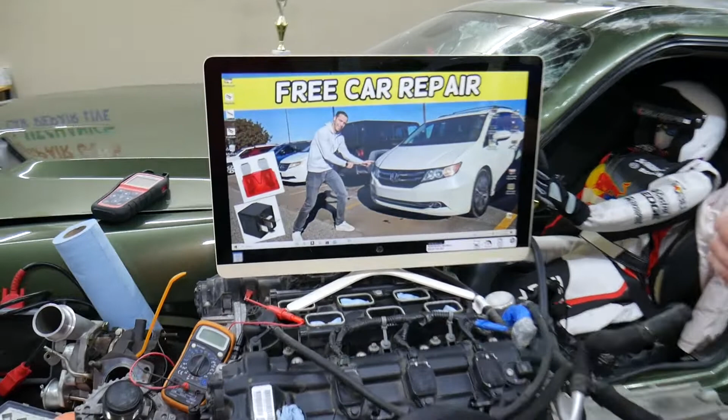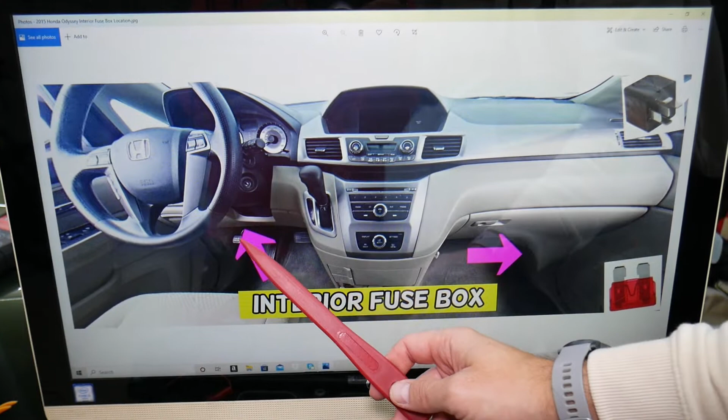So let's go ahead and continue now. The ACG fuse, guys, where it's located - you may have multiple ACG fuses that we need to talk about. First, we'll demonstrate on a 2015 Honda Odyssey. Fun fact, you have 5 different fuse boxes, but we'll only need to work in 2 of them. One of the fuse boxes we need to open is actually under the dash on the driver's side. Just look upside down above the pedals and you'll see a fuse box layout that looks just like this one right here.

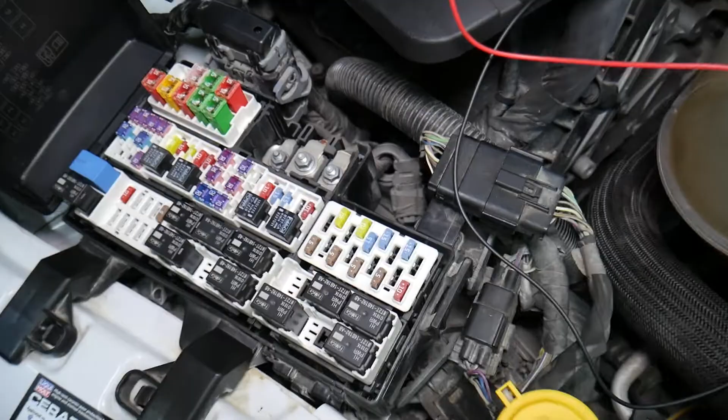Now, before we continue, let's explain why it's important to test fuses and relays. Fuses - not often can you tell just by looking if they're burnt or good. Sometimes they may seem perfectly fine, you think it's a good fuse, you put it back in, and you end up spending money and time on parts and problems that do not exist, when all you had to do was test your fuse, find out it's bad, and replace it to fix your problem. So we will have a video on how to test a fuse, different kinds of fuses, and how to test relays. We're going to put the link in the description of the video below specifically to that video.

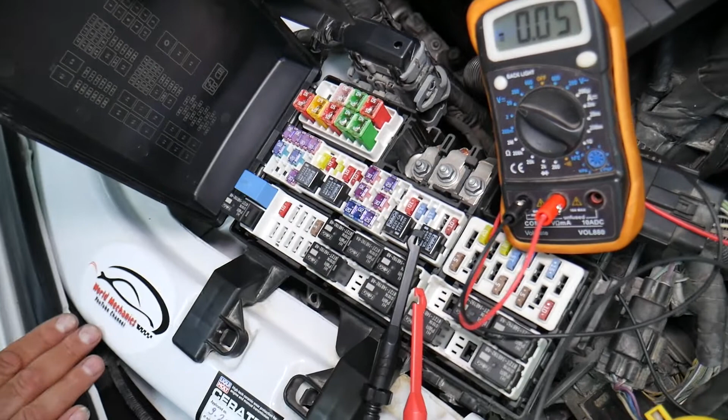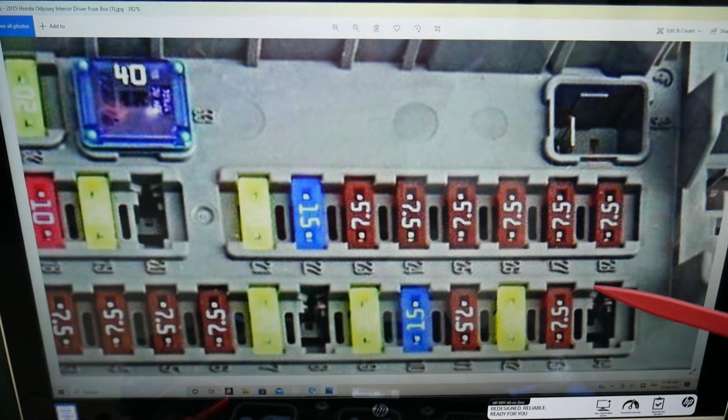Please check it out. So here now, guys, we need to check one fuse, and there are 2 fuses total. What ACG stands for - that's practically a fuse that protects the ignition switch circuit. So practically for the ignition switch, if your Honda Odyssey doesn't start, always check that fuse. If we zoom in next to the fuses, you will see numbers. The number we need to find is fuse number 24. We're talking about that fuse right here, that 7.5 amp fuse - right here, that fuse will need to be checked.

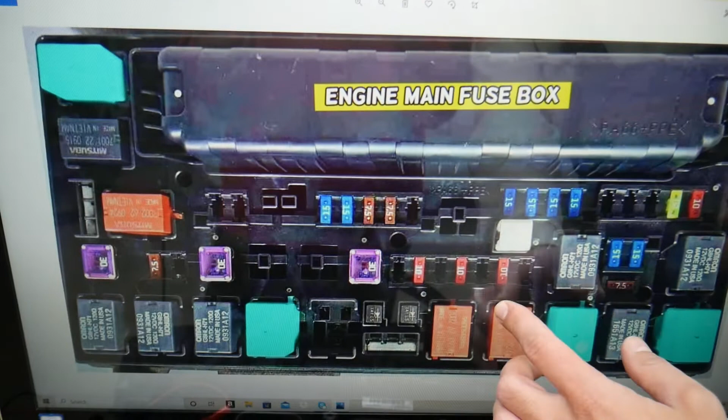You have one more that you need to check. Under the hood, if you open the hood on your Honda Odyssey, right here is your main fuse box. Open that cover and you're going to see that layout right here. Now, if you come right here, that 15 amp fuse known as fuse number 3, that's the ACG fuse as well. Hopefully the video will be helpful.